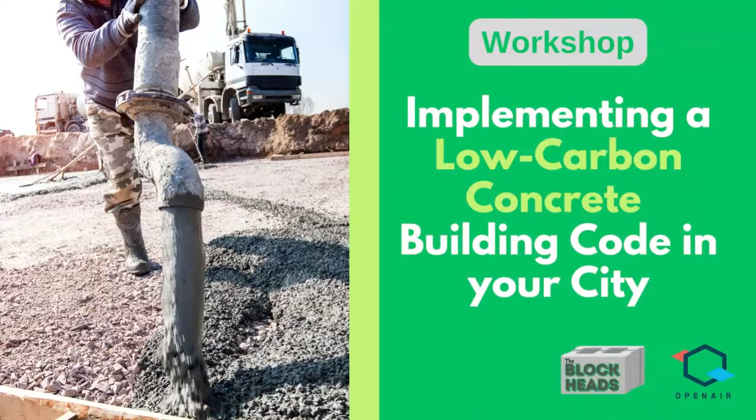My name is Chris Neidl. I am one of the co-founders of the Open Air Collective, and I am the carbon removal lead for the UN Climate Champions. And for many, many years, I have been working on the decarbonization of concrete through policy advocacy at the local and state level.

Normally based in Texas, although I'm a New Yorker. Right now I'm in Brussels, which is a long story, but really pleased that everybody could join us today.

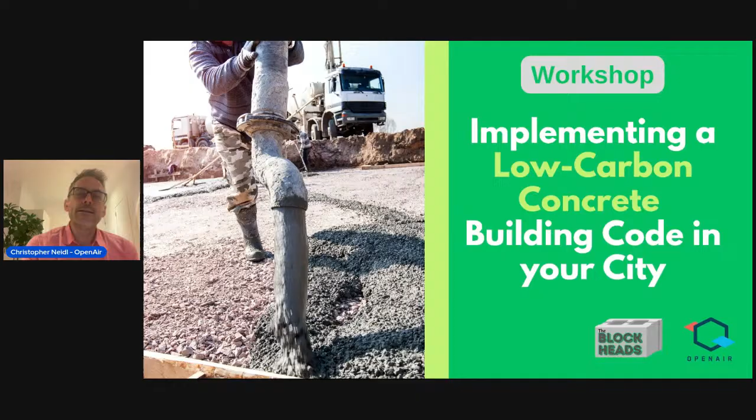And what we're going to do for our agenda, I'll just go through that real quickly. As it says on the title there, this is a workshop, and this is meant to be very practical to talk about what it means to implement a low carbon concrete building code in your city. And we have some amazing experts to talk us through that, who I'll introduce in just a second. But what we'll do is I'm going to just quickly spend probably about 4 minutes going over some key concepts that I think will help get those out of the way for people that are completely new.

And then we're going to be very lucky to have Professor Matt Adams give a presentation, first talking a little bit about what, in practical terms, low carbon concrete even is. So what are we trying to achieve here? And then critically, which is really at the center of our discussion today, he's going to go over a new building code amendment that he actually led the development on with many other engineering professionals at the American Concrete Institute, called ACI Code 232. And this actually gives guidelines for how jurisdictions, whether it's counties, cities, states, can implement a building code that encourages the use of low carbon concrete.

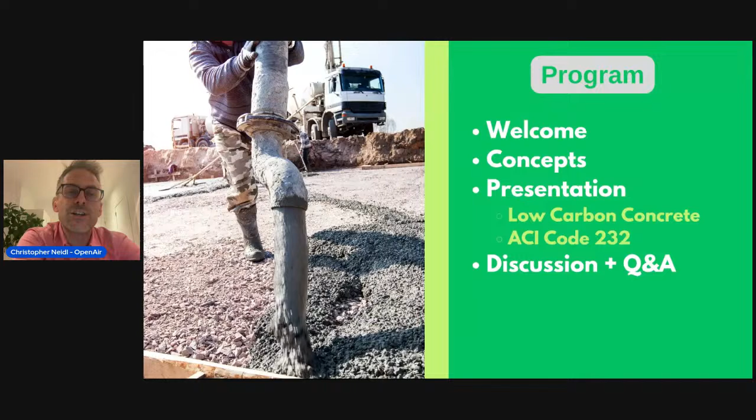Now, who are all of you? We advertise this to basically anybody interested in the subject. This is certainly designed for folks who work within city, county, or even state government, in sustainability departments, in departments of building and code councils, who are looking at this as a subject of interest, and they want to learn more about how it might be implemented in their city. But it's also absolutely of interest to citizens, activists, volunteer, professional, who have heard about this subject and they want to see what they can do to actually help bring this to the attention of the city, county, or state in which they live.

So who we have today, Brian might be on already. I'll let him in in 1 second, but we have an amazing panel of folks who have a lot of practical expertise in this subject and kind of live it every day. Professor Matthew Adams, who you're going to hear from in just a minute, is going to give us our presentation. He is a longtime collaborator of mine. We've worked together for, I don't know, Matt, probably going back 4 years at this point. He has many different roles, including being the chair of the relevant committee that developed this code at the American Concrete Institute. He's also an associate professor at NJIT, and he runs a lab there focused on sustainable cement and concrete.

Kerry Sutton is a senior director at ACI as well. Also an engineer, and is really responsible for educating, outreach, and trying to get this code implemented. She will weigh in on some of the technical aspects along with Matt, but can really talk about the steps that are involved in actually implementing a code.

And then we're really thrilled to have Brian Reyes, who's the senior circular economy coordinator for the city of San Francisco's environment department. But prior to that, he was actually one of the key figures involved in developing a predecessor program, the first in the country, that Marin County, California, came out with, I believe, back in 2019, that was the first to actually introduce low embodied carbon concrete in the building code. And so he can tell us a little bit about the process of that, but with some years in hindsight, can also tell us a little bit about what has been learned.

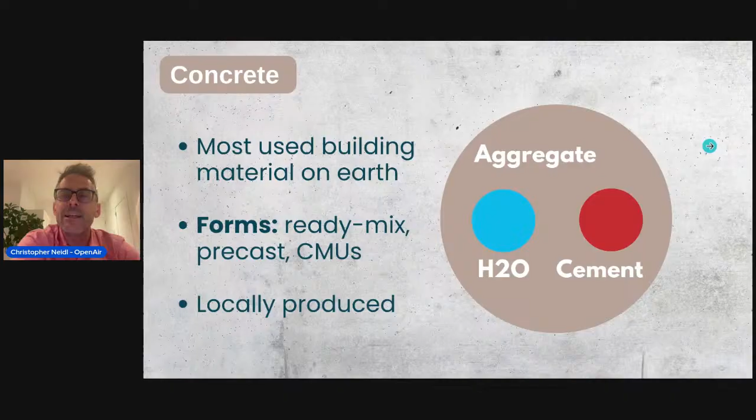Concrete is a really simple material. Matt will probably go into it a little bit more, but it's basically a bunch of sand and gravel that we call aggregate mixed with some water, and then cement. I know Matt will tell us that there are some other bits and bobs in there as well, but those are the main parts. The cement is the very critical material that's the binding agent that kind of pulls it all together, and really to which its hardening ability and its strength abilities can be mostly attributed.

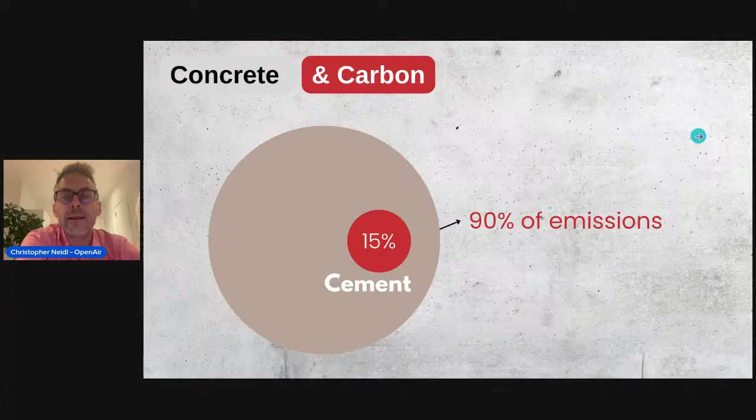It's also the key part of the discussion when we talk about the impact of concrete from a climate perspective. Cement, if it was its own country, it would be the third largest emitter in the world. It accounts for about 8% of emissions. And depending on the mix, some have more cement than others, but if you take an average, about 90% of the carbon emissions that are associated with concrete trace back just to that one ingredient, cement, which often is relatively small proportionally relative to those other ingredients.

A couple of concepts that we're going to be talking about that are important. There won't be many of them, but one is embodied carbon. So some people, when they think of carbon emissions, think of smoke coming out of a tailpipe or out of a smokestack, and associate it with using things that use energy. That's called operational carbon. Here we're talking about embodied carbon, and with materials like steel and asphalt and glass and concrete, the emissions associated with them are not in their use, but rather in how they're made. And so that's the carbon that's sort of embodied in the process of actually making the concrete before it's actually laid.

And then related to that, ways in which we measure embodied carbon, which we'll be talking about, GWP, or global warming potential. This is a numeric value that basically equates to kilograms of carbon per cubic yard of concrete. And this is a number that we use to rate all sorts of materials and products, but certainly for concrete, a higher GWP means there's more embodied carbon, and a lower one means less, and that's what we use as our tool of measuring progress or compliance.

Quick thing here, in terms of what we're talking about: what are the ways in which local governments can be linked to decarbonization? What types of policies or programs or practices can have the biggest impact? Certainly procurement is one that I've worked on a lot. Governments, local, state, and national, buy a lot of concrete for public infrastructure, buildings, bridges, et cetera. And almost over 30% of all concrete is purchased and used by the public sector. So governments of all kinds have power in the way they procure concrete.

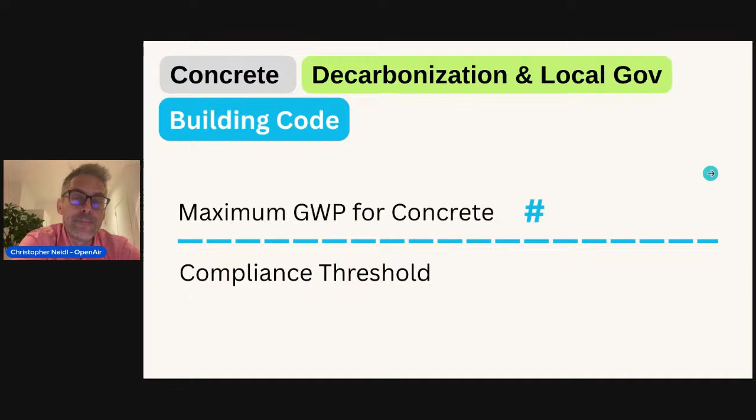And it's important to point out, for those of you who are in California or Colorado and maybe soon to be New York City, which has a bill pending right now that would add maximum embodied carbon to a host of different building materials, including concrete. These other programs like CalGreen and the soon to be implemented Model Green Code in Colorado, they're not exactly the same, but they have similar enough designs where I think what we discuss today, some of the practicalities of implementation, will be relevant to you as well if you're in either of those two states.

But again, I'm going to hand it over to my friend and our guest today, Professor Matthew Adams, and he's going to talk first about defining in practical material terms what low embodied carbon concrete or low carbon concrete is, which is really important when you're thinking, well, what are we asking of builders in our city if we were to implement such a code? And then he's going to get into what the code actually calls for and what is contained within it.

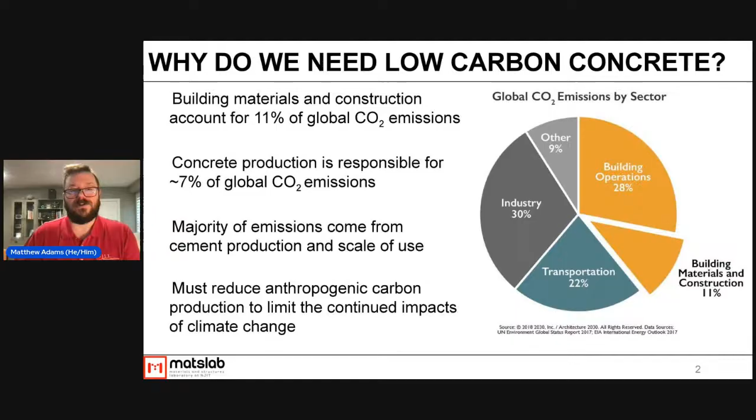We can reduce our carbon production associated with concrete, and a lot of the technologies and methods that we develop end up getting exported out to other places around the world. And we're also importing ideas from around the world as well. So this is really a collective effort of researchers and policy folks from around the world that we're working to bring in some of the best ideas.

So what is low carbon concrete? Low carbon concrete is a term you've probably heard if you're here before. Until the code, there really wasn't a set definition for what low carbon concrete is. In reality, it's a performance requirement that is set by your licensed design professional or your LDP, and it's based on reducing your global warming potential below a threshold.

So in order to do that, you have to define a benchmark. So you have to set your threshold of where you are in terms of GWP, and you need to define a reduction level. So once you hit that reduction level, you have what is called low carbon concrete. This number can vary because what is low is relative to your particular location. As Chris mentioned, concrete is somewhat necessarily a local material.

So the tools that we have to make concrete in one part of the world or one part of the country are different than in other parts. I'll talk in a second about some of the different components, but really concrete can vary quite a bit from location to location. And so what is considered lower carbon systems in, say, New York City may not be possible to be made in certain parts of North Dakota or northern Canada, for example.

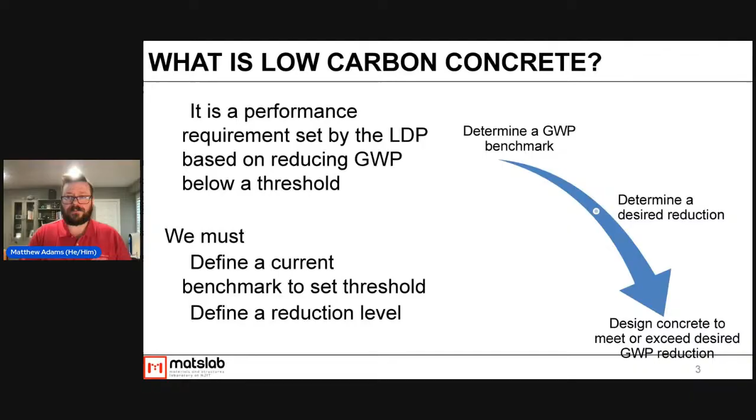So how do we get to low carbon concrete? Like I said, it's a design goal. There are lots of levers and knobs that we can simultaneously use to reduce embodied carbon. Much of this is going to be subject to local availability and cost. And so, like I said, what is available in your local area? So working with your local manufacturers is really important.

And when we're changing from standard practice systems to newer systems, they really require knowledgeable folks along the entire construction chain, right? So not just the engineers designing it, but our contractors, our suppliers, all of our laborers that are out there placing the concrete. Everybody needs to understand some of the differences.

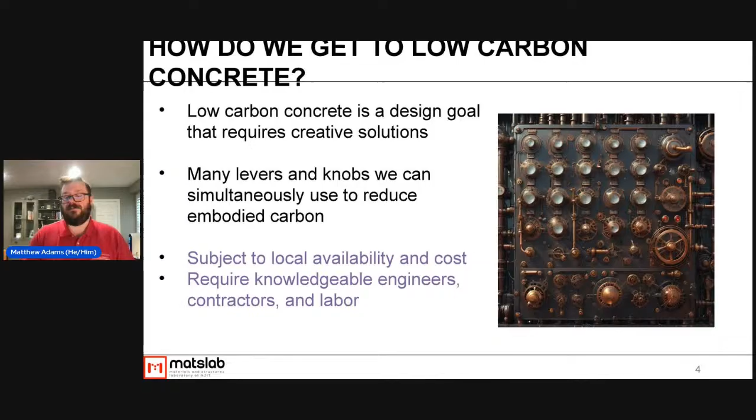If we think about concrete as a cookie, right? You have your regular chocolate chip cookie, and we can think of concrete in that way. In a chocolate chip cookie, you've got eggs, flour, and butter. These are our glue or our binder that hold everything together, similar to concrete where we have cement and water. When Portland cement mixes with water, it does this process we call hydration. It hardens up and it glues everything together.

In our cookies, we have filler and flavor. These are sugar and chocolate chips. In concrete, that's sand and gravel. We use as much sand and gravel as we can because it's cheaper than cement, and it also has lower embodied carbon. And then we have modifiers such as our baking powder and baking soda in cookies. In concrete, we use a lot of chemical admixtures and perhaps some mineral admixtures. These will help change some of the properties.

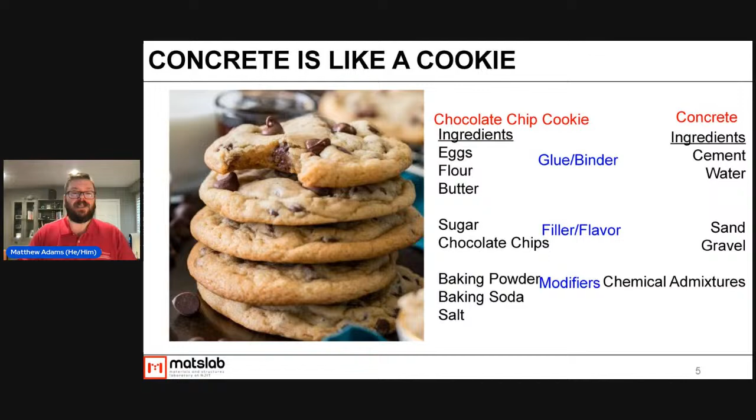Like a chocolate chip cookie, though, there isn't just one way to make concrete. We can change out all of our filler and flavor. We can change out the types of binder ingredients that we use. There are lots of different tools out there that we can use. And by making some of those changes, we can start to see reductions in carbon emissions.

This can involve complete replacement of the binder with something else. We see this in what are called alkali activated systems or geopolymers. We see other types of materials like calcined clays. Biochar is starting to get a lot of attention lately. So that's one way that we can do that, by replacing that high emitting cement with materials that emit less or are waste products.

We can also work on reducing the overall binder content, so reducing the total amount of cementing materials that we have. We do that by increasing our aggregate content. That requires some engineering of our aggregates to understand how they all fit together. But the more we can get the aggregates packed into the system, the less glue we need to hold them together.

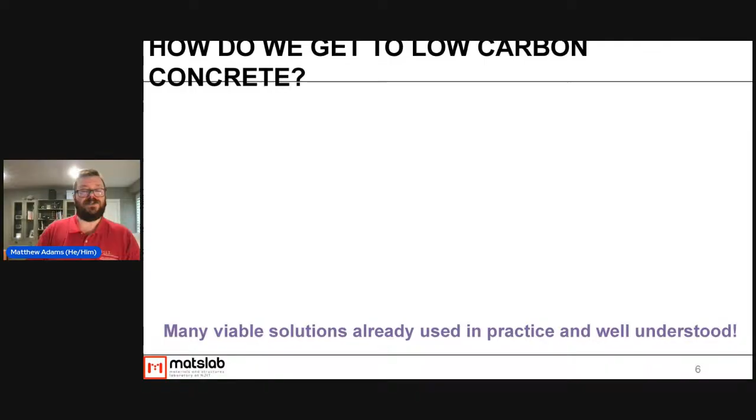So those are some of the pitfalls with new materials, but we do have a lot of viable solutions that are already used in practice and well understood. So moving to lower carbon concrete is not actually all that difficult for us. Getting to zero carbon concrete is another question. That is something that we don't really have the technical capabilities to do yet on a wide scale, but we're working on it.

The issue is that a lot of these policies are great, but they're all being developed independently of each other. And so there's a lot of variation in methodology. And most of them are requiring what we call prescriptive limitations. So they're really stifling innovation and flexibility within concrete design. And additionally, some policies are being proposed that list really unrealistic or unattainable long-term goals.

Like I said in the last slide, we don't really have a method of getting to zero carbon yet. Net zero is a different question in terms of buying offsets. That's sort of outside of my realm of expertise into whether offsets work or not. But we don't have the tools in place to get to zero right now. And so we're seeing policies that are being proposed that are saying that by 2040 or 2050, we're going to get down to zero carbon associated with concrete.

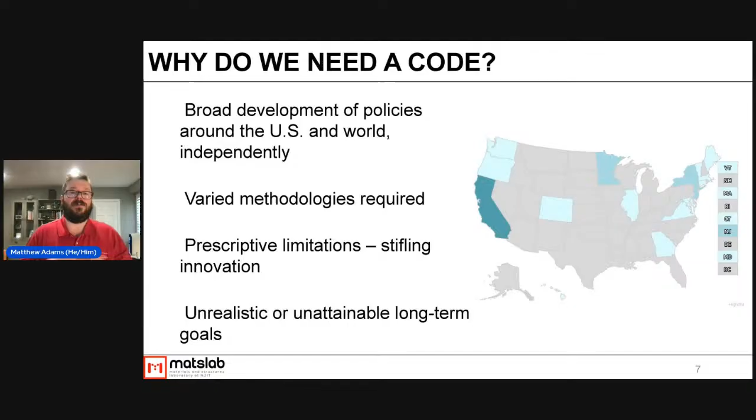We want to be really careful about policies like that, because when we implement policies that are not attainable, they end up just getting ignored. So we want to move forward with realistic and attainable policies. So this led us to developing this code. The need for it was out there as we're seeing people trying to work on how to get to this, how to set requirements. This code is the first of its kind in terms of model building codes worldwide.

It followed a consensus process, meaning that we had a group of people that had to come together, had to agree on the best practices. Then, once we had the approval within the American Concrete Institute, it went out for public comment. And during that consensus process, we have to not just look at every public comment that comes in, but we have to respond to every comment that comes in, right? So we can't just look at it and ignore them. We need to have a response.

This code provides designers with a method of setting GWP requirements for concrete associated with their project. Currently, the code only applies to ready-mix concrete within a strength range of about 2,500 PSI to 8,000 PSI. We're looking to expand that. Hopefully, we will include precast in the next round.

The reason why we were limited was, one, we limited the scope to get something out quickly because the need was there. And two, there's a real data issue in terms of setting benchmarks and thresholds. We don't have a lot of widely available data on the global warming potential of concrete that's currently used and really project-specific global warming potentials. There's lots of great industry-wide and national averages out there, but that's not really good data in terms of getting a realistic picture of what's out there.

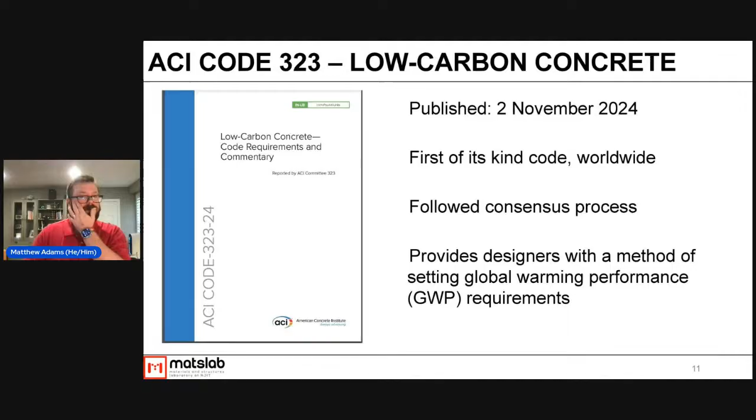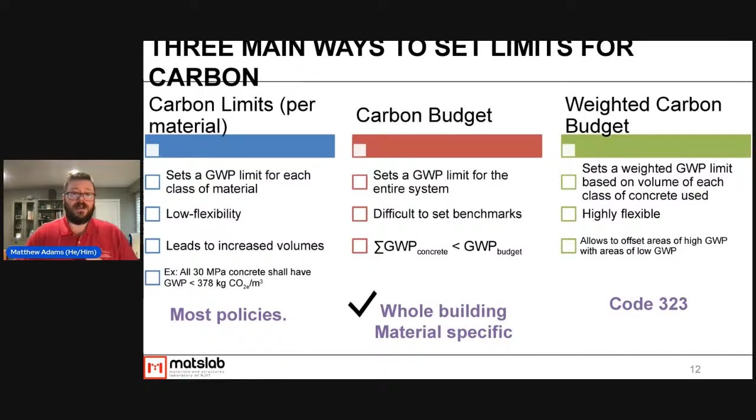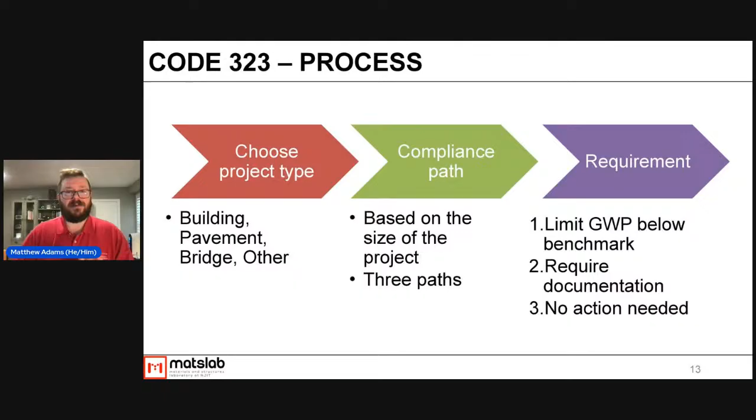Once this becomes standard practice and concrete producers have all of the right paperwork put together, all of the right systems are in place, then we can increase the requirements. But we don't want these difficulties to be a barrier to acceptance of the code. So once we get future versions of this code, we'll likely see this change. So with that, I'm going to end there. I know that there's probably lots of questions. This doesn't answer everything, but we're going to answer some more questions throughout the next part.